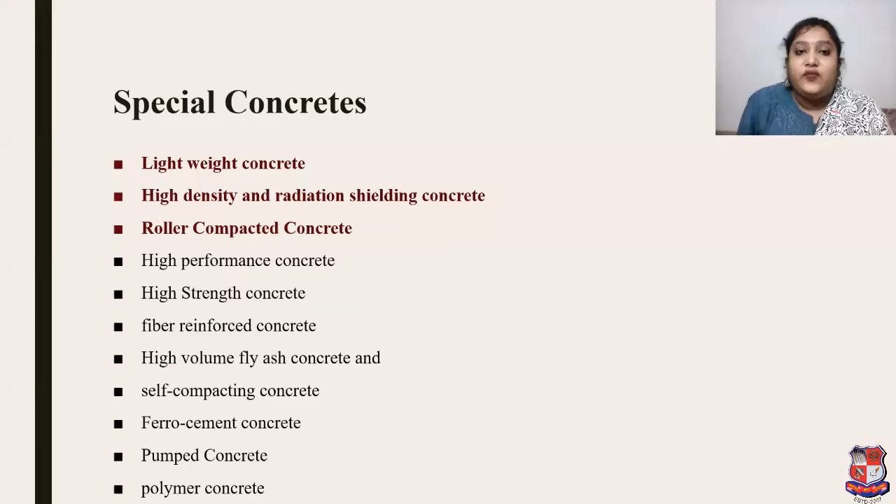If we are going to construct a structure, in that we need a good tensile nature of that concrete, good toughness of that concrete, then we will go for fiber reinforced concrete. Then as per the application there are different types of special concrete. So based on that, we will cover 3 concretes in today's topic.

So before discussing those 3 types of concrete, we will focus on the main concern: concrete. What is concrete? Concrete is the most widely used man-made construction material in the world and is second only to water as the most utilized substance on the planet.

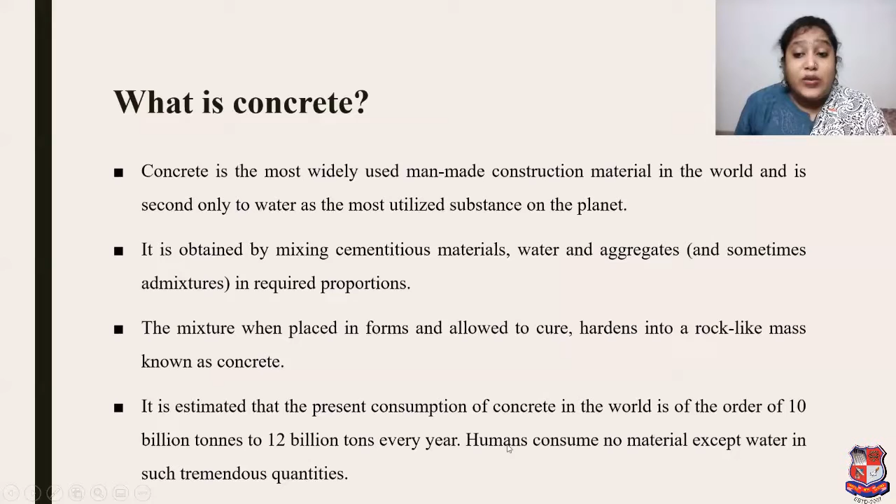Now before discussing our main special type of concrete, our main focus is on concrete. So what is concrete? Concrete is the most widely used man-made construction material in the world and is second only to water as the most utilized substance on the planet. It is obtained by mixing cementitious materials, water and aggregate, and sometimes admixtures, in required proportion as per the need of concrete and its application. The mixture, when placed in forms and allowed to cure, hardens into a rock-like mass known as concrete, meaning it's a hard material. It is estimated that the present consumption of concrete in the world is of the order of 10 billion to 12 billion tons every year. Humans consume no material except water in such large quantity.

Now regarding special concrete in recent trends: notwithstanding its versatility, cement concrete suffers from several drawbacks also, like low tensile strength, permeability to liquids and consequent corrosion of reinforcement, susceptibility to chemical attack, and low durability. Modifications have been made from time to time to overcome the deficiency of cement concrete, yet retaining the other desirable characteristics. Recent developments in material and construction technology have led to significant changes resulting in improved performance, wider and more economical use. So as per need, we have to change our type of concrete, using special chemical admixtures and chemical agents, and as per application, we have to prepare our special concrete.

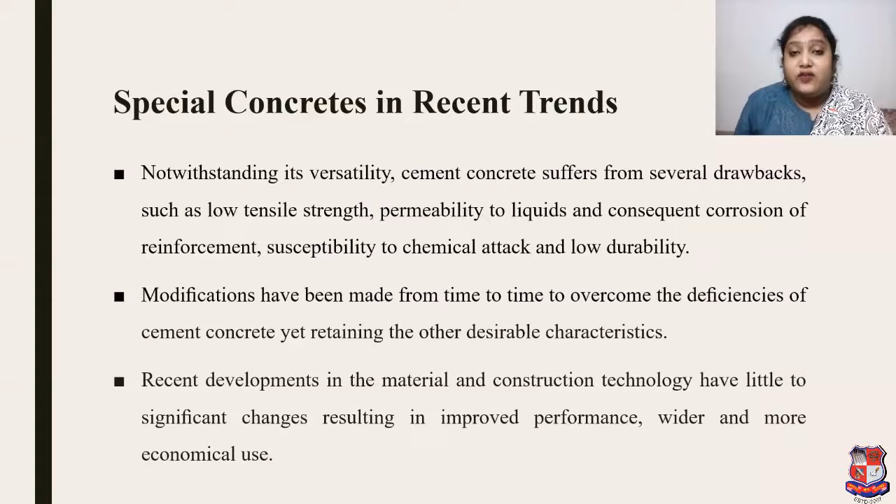So regarding lightweight concrete, this image is taken from that source. By observing this image, you can see that a lady holds that concrete cube very easily, right? By seeing the image, you can imagine how light these concrete cubes are.

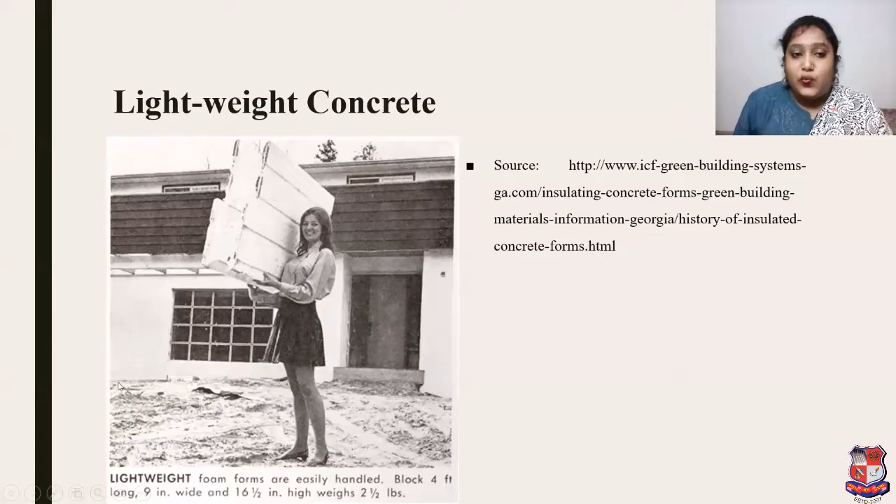Okay, so we can say that definitely it's a lightweight concrete. One of the disadvantages of conventional concrete is its high self-weight. Density of normal concrete is in the order of 2200 to 2600 kilogram per meter cube. This heavy self-weight makes it, to some extent, an uneconomical structural material.

The lightweight concrete, as we call it, is a concrete whose density varies from 300 to 1850 kg per meter cube.

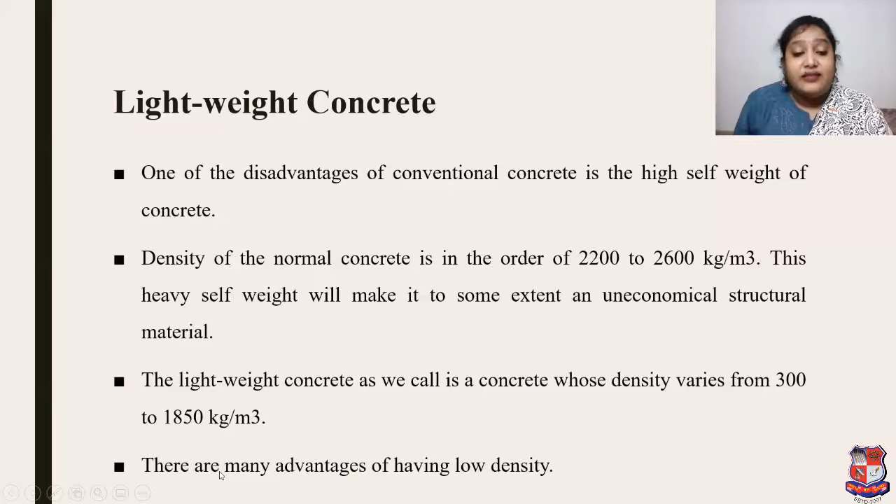There are many advantages of having a low density. It helps in reduction of dead load, increases the progress of building, and lowers the haulage and handling cost. The weight of a building on the foundation is an important factor in design, particularly in the case of weak soil and tall structures.

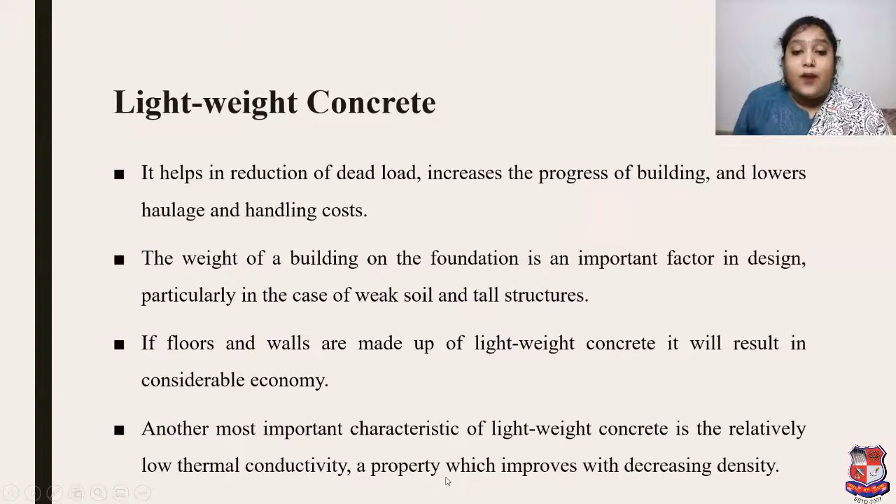If floors and walls are made up of lightweight concrete, it will result in considerable economy. Another important characteristic of lightweight concrete is its relatively low thermal conductivity, a property which improves with decreasing density. It's a salient feature. In extreme climatic conditions and in buildings where air conditioning is installed, the use of lightweight concrete with low thermal conductivity gives considerable advantage from the point of view of thermal comfort and lower power consumption. So we can say it saves electricity.

The adoption of lightweight concrete gives an outlet for industrial waste such as clinker, fly ash, slag, etc., which otherwise create problems for disposal. Basically, there is only one method for making concrete light: by the inclusion of air in concrete.

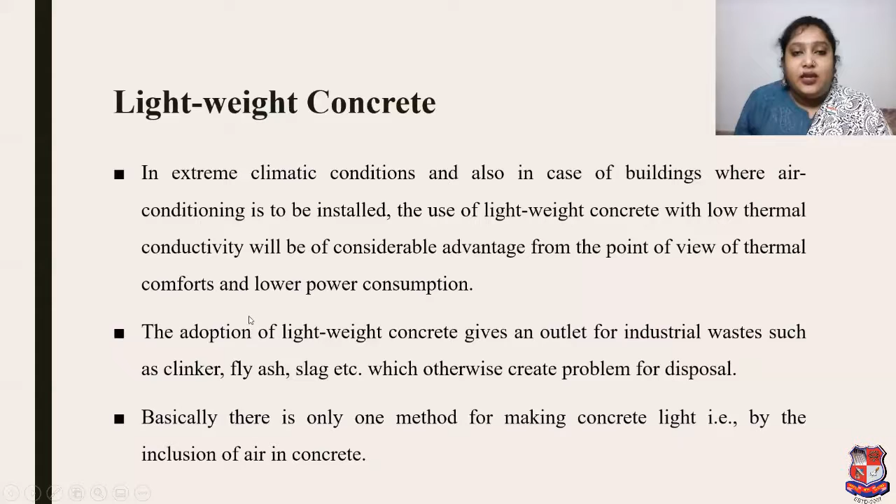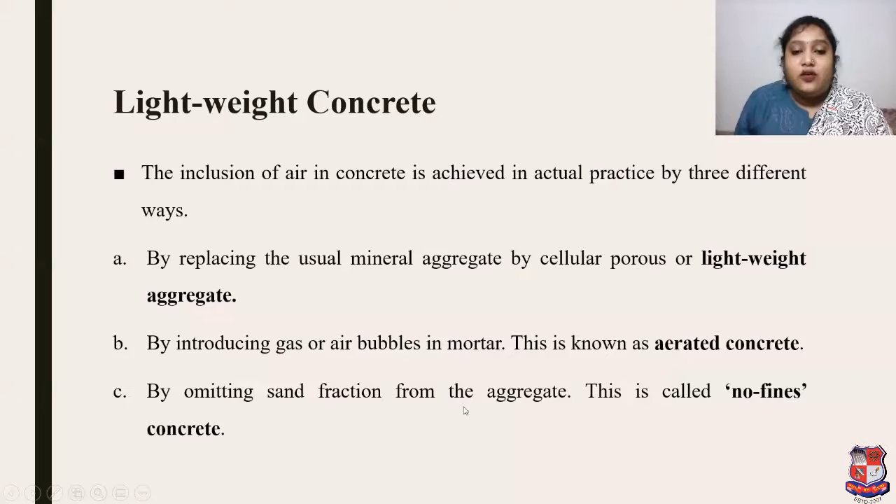The inclusion of air in concrete is achieved in actual practice by three different methods. First, by replacing the usual mineral aggregate by cellular, porous, or lightweight aggregate. Second, by introducing gas or air bubbles in mortar; this is known as aerated concrete. Third, by omitting the sand fraction from the aggregate; this is called no fines concrete.

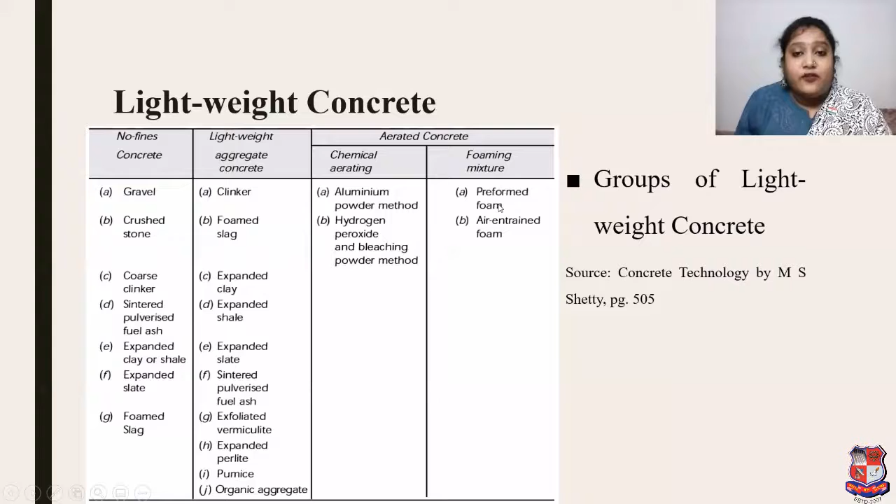In chemical aerating, there is the aluminium powder method and the hydrogen peroxide and bleaching powder method. In foaming mixture, there is the preformed foam method and the air-entrained foam method.

The lightweight aggregate can be classified into two categories: natural lightweight aggregate and artificial lightweight aggregate. Under natural lightweight aggregate, pumice, scoria, volcanic cinder, sawdust, and rice husk are included. Under artificial lightweight aggregate, artificial cinder, sintered fly ash, slag, and bloated clay are concerned.

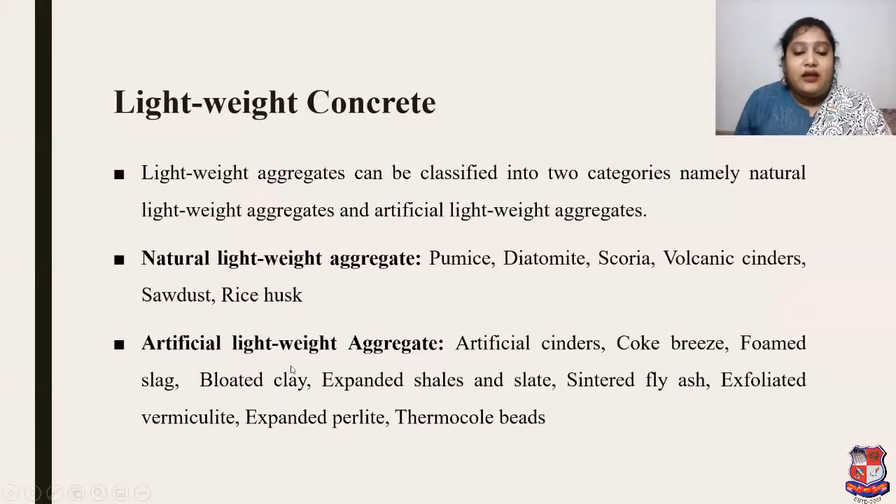Aerated concrete is made by introducing air or gas into a slurry composed of Portland cement or lime and finely crushed siliceous filler, so that when the mix sets and hardens, a uniformly cellular structure is formed. Though it is called aerated concrete, it is really not a concrete in the correct sense of the word; as described above, it is a mixture of water, cement, and finely crushed sand.

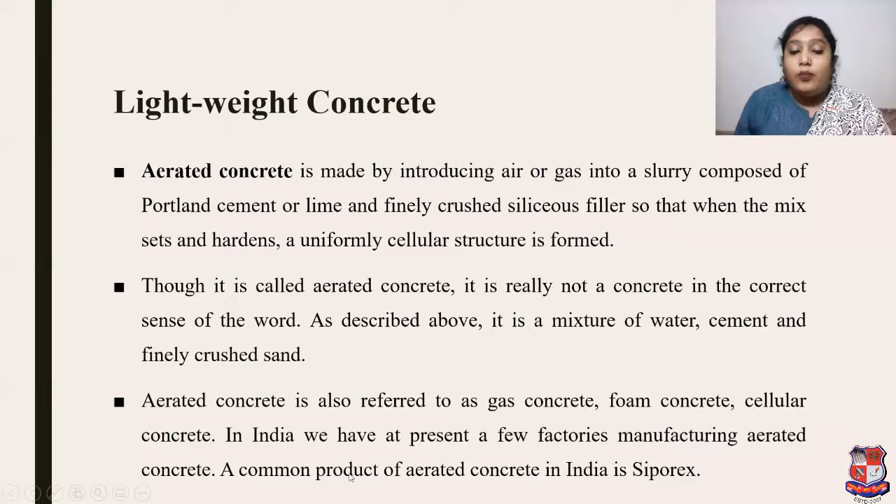Aerated concrete is also referred to as gas concrete, foam concrete, or cellular concrete. In India, we have at present a few factories manufacturing aerated concrete. A common product of aerated concrete in India is Siporex.

No fines concrete, as the term implies, is a kind of concrete from which the fine aggregate fraction has been omitted. This concrete is made up of only coarse aggregate, cement, and water. Very often, only single-sized coarse aggregate of size passing through 20 mm and retained on 10 mm is used.

No fines concrete is becoming popular because of some of the advantages it possesses over conventional concrete. The single-sized aggregates make a good no-fines concrete which, in addition to having large voids and hence being light in weight, also offers an architecturally attractive look.

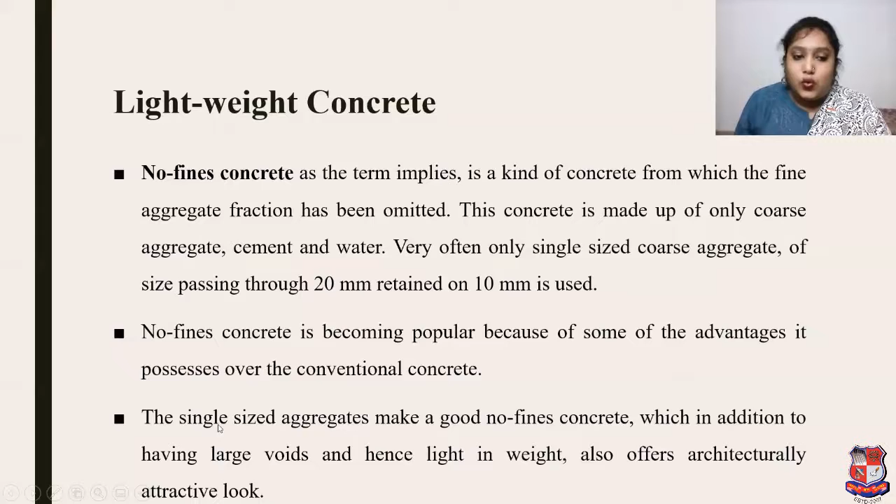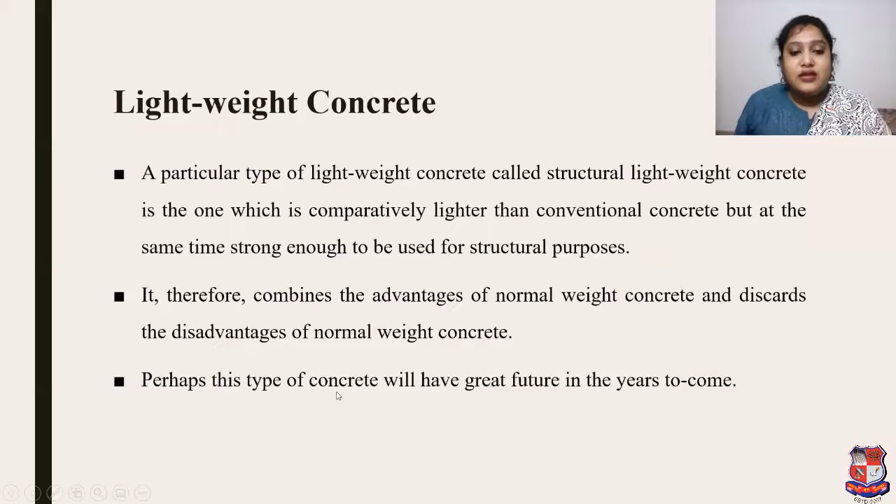A particular type of lightweight concrete called structural lightweight concrete is comparatively lighter than conventional concrete, but at the same time it is strong enough to be used for structural purposes, and that is again the salient feature of that lightweight concrete. It therefore combines the advantage of normal weight concrete and discards the disadvantage of normal weight concrete. Perhaps this type of concrete will have a great future in the years to come.

Out of the three main groups of lightweight concrete, lightweight aggregate concrete and aerated concrete are more often used than no-fines concrete. Lightweight concrete can also be classified based on the purpose for which it is used, such as structural lightweight concrete, non-load bearing concrete, and insulating concrete. Aerated concrete, which was mainly used for insulating purposes, is now being used for structural purposes, sometimes in conjunction with steel reinforcement.

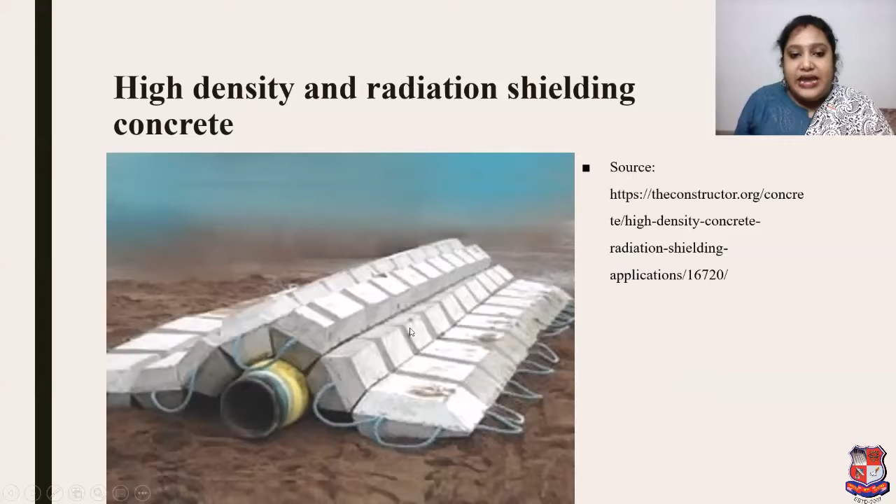Now, high density and radiation shielding concrete. The image is taken from the source mentioned here. In the image, maybe you can't see properly, but that pipe is under sea water, and above that pipe concrete cubes are kept. Why? Because due to the pressure of water that pipe will not come up, so to hold that pipe under sea water, that concrete is kept. Based on that, we can assume the density of that concrete.

To call the concrete a high density concrete, it must have a unit weight ranging from 3360 kg per cubic meter to 3840 kg per cubic meter, which is about 50% higher than the unit weight of conventional concrete. They can, however, be produced with densities up to 5280 kg per cubic meter using iron as both fine and coarse aggregate.

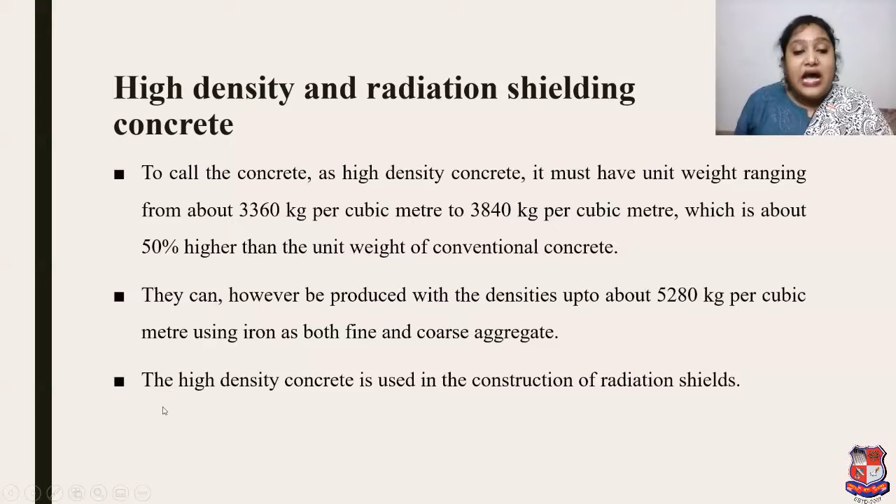High density concrete is used in the construction of radiation shields. Large scale production of penetrating radiation and radioactive materials as a result of the use of nuclear reactors, particle accelerators, industrial radiography and X-ray, gamma ray therapy require shielding material for the protection of operating personnel against the biological hazard of such radiation. Concrete, both normal and high density, is an effective and economic construction material for permanent shielding purposes.

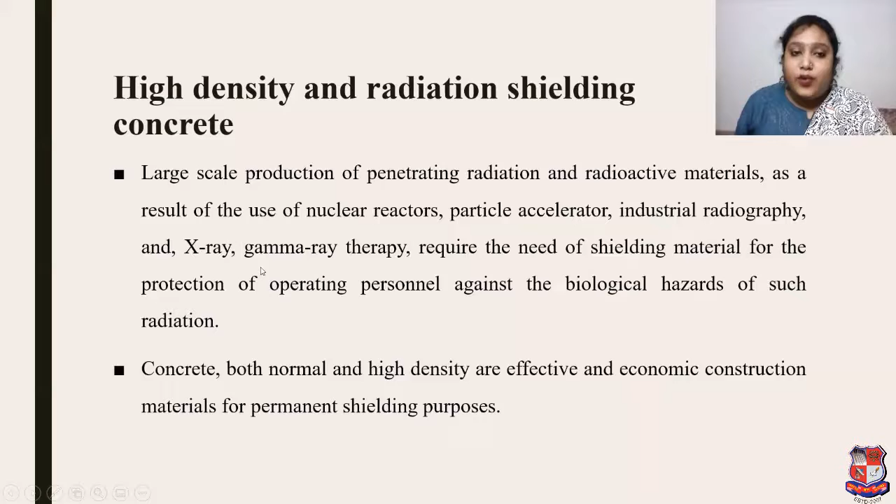There are many aggregates whose specific gravity is more than 3.5 for making heavyweight concrete. Out of these, commercially employed aggregates are barite, magnetite, hematite and many more. Also available are steel and iron aggregate in the form of shots and punching scrap for use as heavyweight aggregate. In determining...

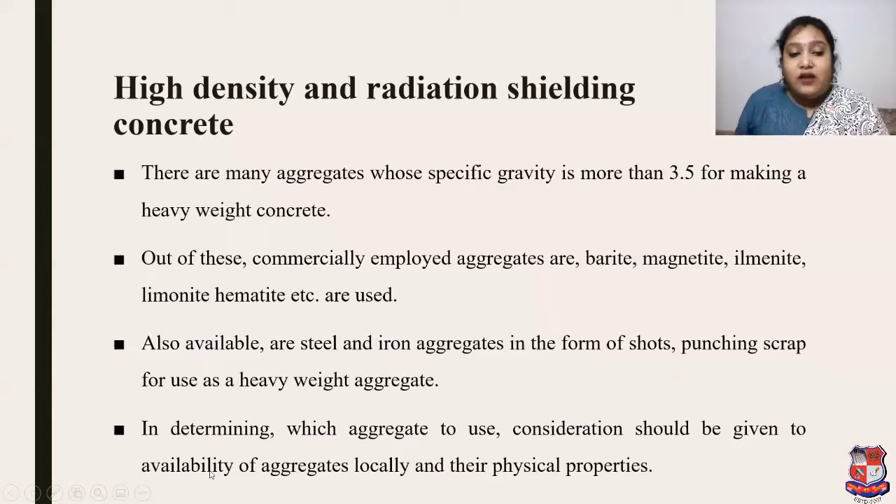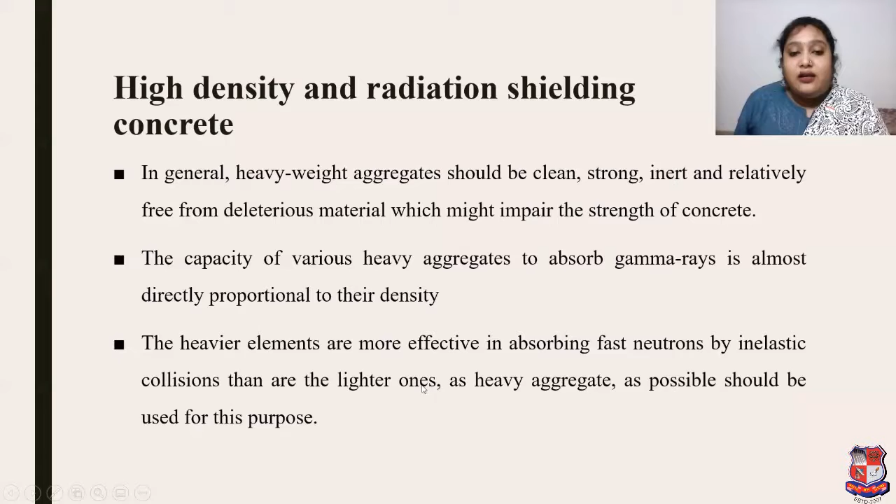In determining which aggregate to use, consideration should be given to the availability of aggregate locally and their physical properties. In general, heavyweight aggregates should be clean, strong, inert and relatively free from deleterious material which might impair the strength of concrete. The capacity of various heavy aggregates to absorb gamma rays is almost directly proportional to their density. The heavier elements are more effective in absorbing fast neutrons by inelastic collisions than lighter ones. As heavy an aggregate as possible should be used for this purpose.

However, density is not the only factor to be considered in the selection of an aggregate for neutron concrete shield. These materials contain a high percentage of water of hydration. On heating the concrete, some of this fixed water in the aggregate may be lost. Limonite and goethite are a reliable source of hydrogen as long as the shield temperature does not exceed 200 degrees centigrade, and serpentine is good up to about 400 degrees centigrade.

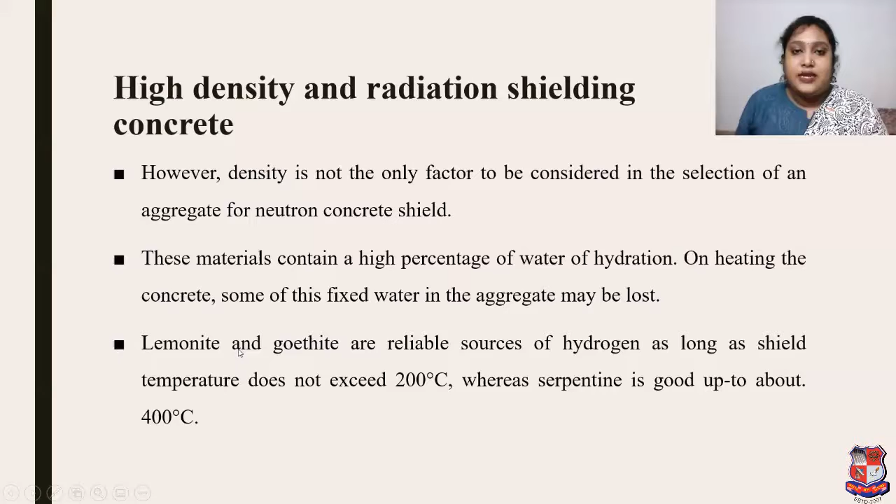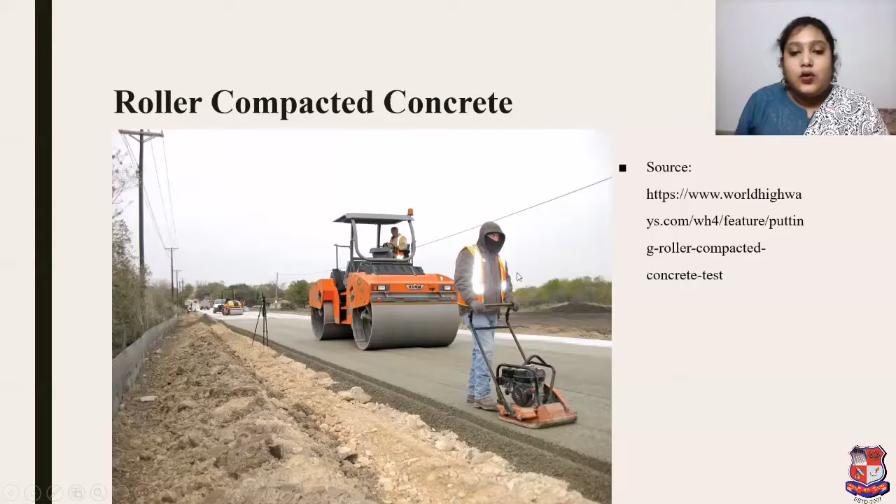Here you can see the image of roller compacted concrete. That image is taken from this source. From the image you can see concrete laying on the surface and a person compacting it through a roller. So ACI 207.5R-89 defines roller compacted concrete as concrete compacted by roller compaction. The concrete mixture in its unhardened state must support a roller while being compacted. The development of roller compacted concrete caused a major shift in the construction practice of mass concrete dams.

The traditional method of placing, compacting and consolidating mass concrete is at best a slow process. Improvement in earth moving equipment made the construction of earth and rock fill dams speedier and therefore more cost effective.

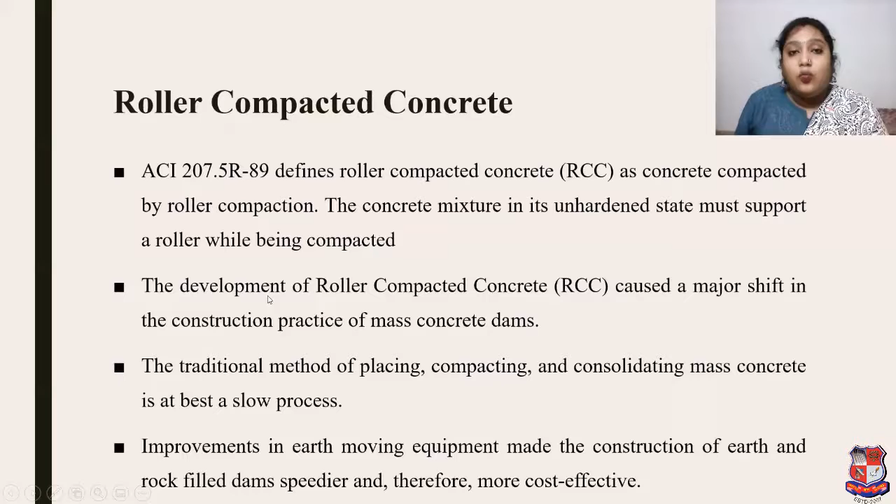Roller compacted concrete is placed in layers thin enough to allow complete compaction. The optimum layer thickness ranges from 20 to 30 cm.

To ensure adequate bonding between the new and old layer or at a cold joint, segregation must be prevented, and a high plasticity bedding mix must be used at the start of the placement.

For effective consolidation, roller compacted concrete must be dry enough to support the mass of the vibrating equipment, but wet enough to allow the cement paste to be evenly distributed throughout the mass during mixing and consolidation process.

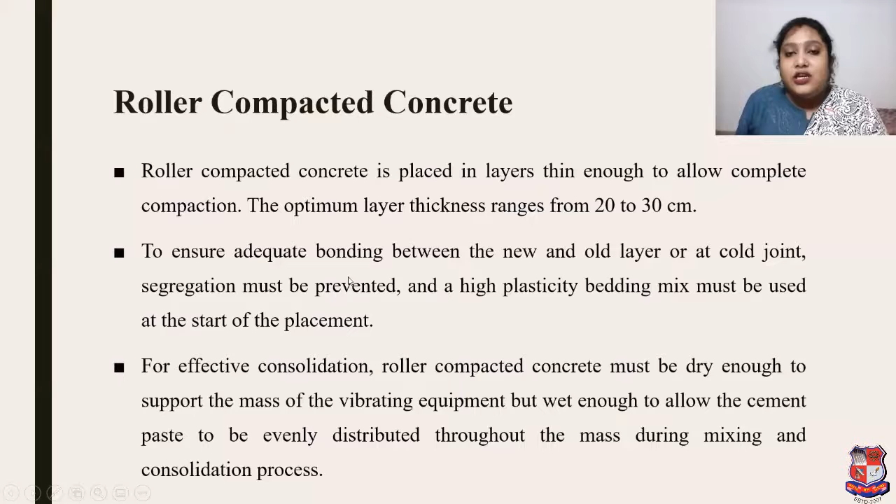In India, roller compacted concrete has been used as base concrete in the construction of the Delhi Mathura concrete road project. Similarly, roller compacted concrete has been used as base course concrete in the Pune Mumbai Express Highway construction. In both projects, the roller compacted concrete was referred to as dry lean concrete.

The grade of concrete was M10, where M represents mixture and 10 represents its strength in megapascal after 28 days, with a thickness of 15 cm. Such concrete was thoroughly compacted by a vibratory roller, over which pavement quality concrete of grade M40 and 35 cm thick was laid.

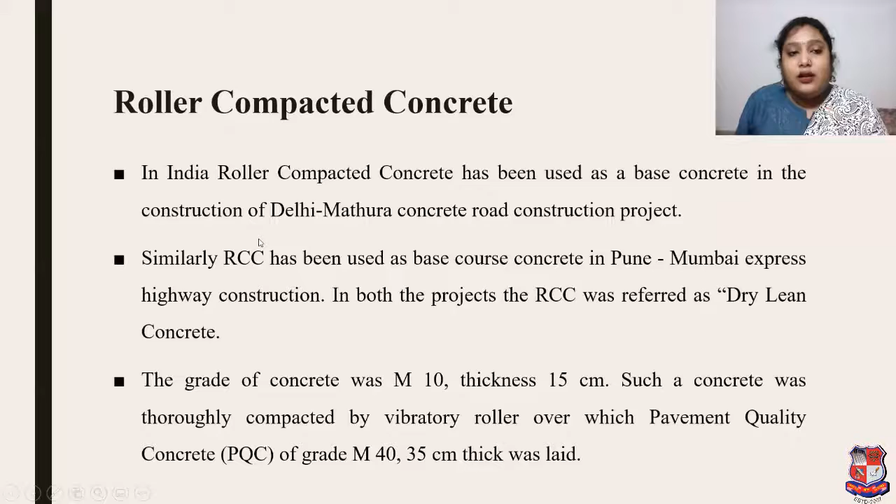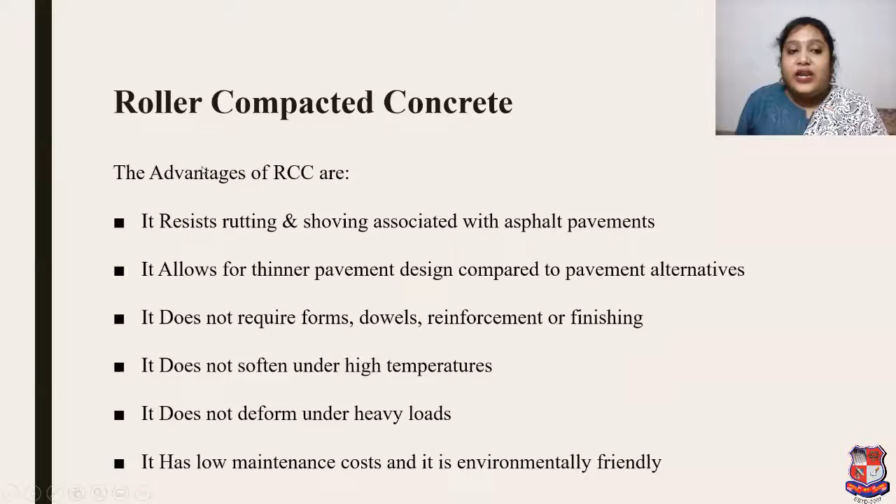If we discuss the disadvantages, roller compacted concrete does not have the aesthetic appeal offered by conventional concrete.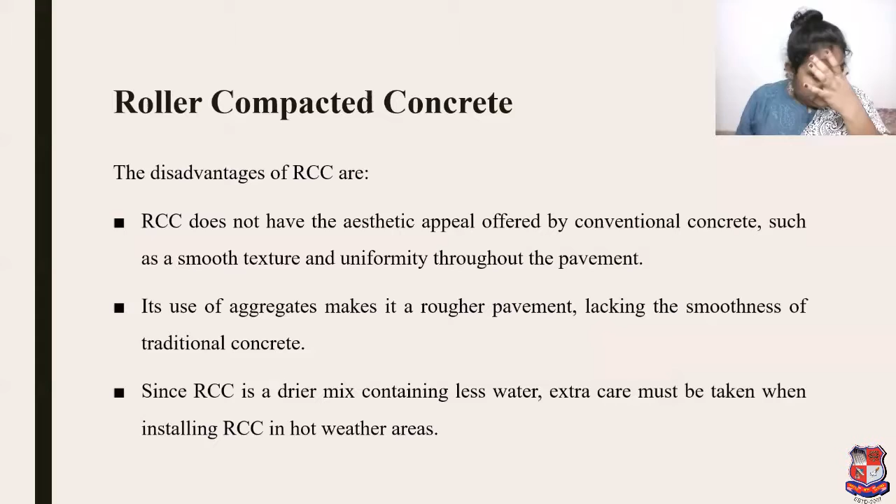If we discuss the disadvantages of roller compacted concrete, RCC does not have the aesthetic appeal offered by conventional concrete, such as a smooth texture and uniformity throughout the pavement. Its use of aggregate makes it a rougher pavement, lacking the smoothness of traditional concrete.

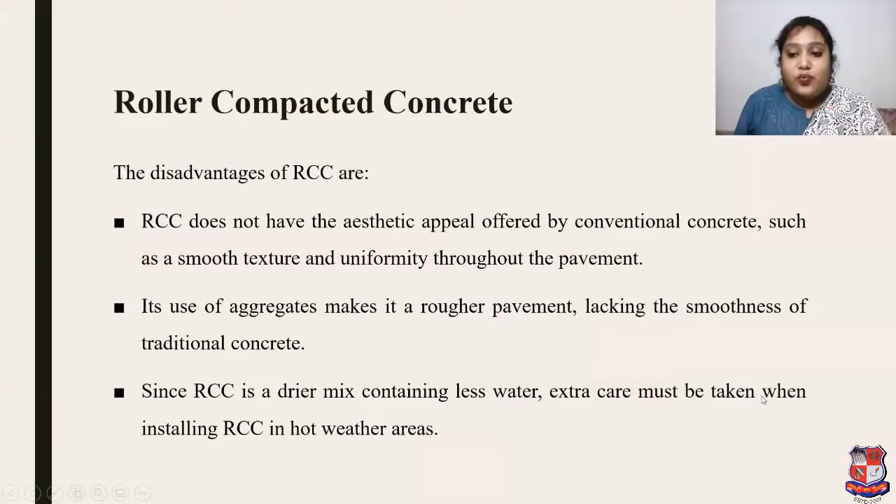Since roller compacted concrete is a drier mix containing less water, extra care must be taken when installing RCC in hot weather areas.

So dear students, as per our syllabus, we covered three special types of concrete. Based on that theory, we can give a small comparison between normal concrete and special concrete. Normal concrete is used for normal work like buildings, bridges, roads, etc.

As I mentioned earlier about special concrete, this type of concrete is used for special types of structures like nuclear reactors, buildings with acoustic treatment, air conditioned buildings, heavy bridges, and heavy dams.

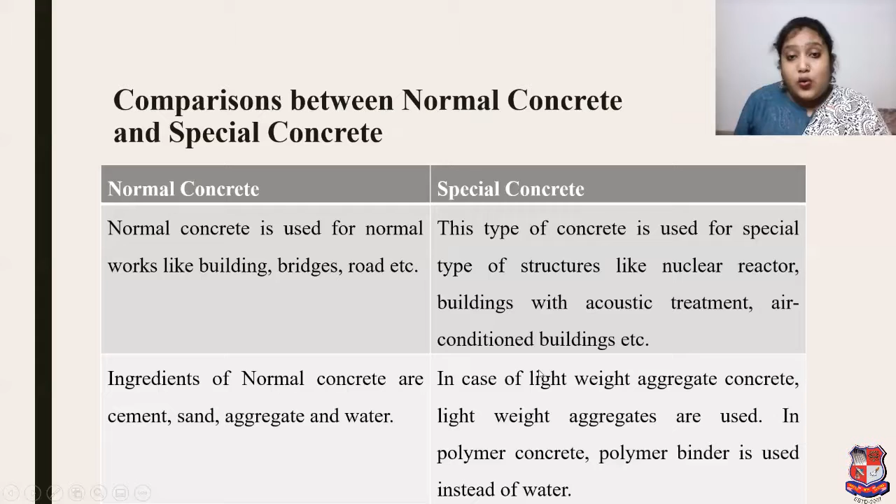Ingredients of normal concrete are cement, sand, aggregate and water. In special concrete, in case of lightweight concrete, lightweight aggregates are used. In polymer concrete, polymer binder is used instead of water. In fiber reinforced concrete, fiber is used. So as per application, the concrete ingredients change.

Construction is carried out by conventional methods in normal concrete, but in special concrete, construction is done by special techniques. In normal concrete, properties like density and strength are of normal range, but in special concrete, properties like density and strength are of higher range.

For example, the density of lightweight concrete is about 500 to 2000 kilogram per meter cube, and that of heavyweight concrete is about 3000 to 5000 kilogram per meter cube. By mistake an extra point is shown there, so don't consider it.

Normal concrete is economical, and special concrete is costly because it requires special techniques.

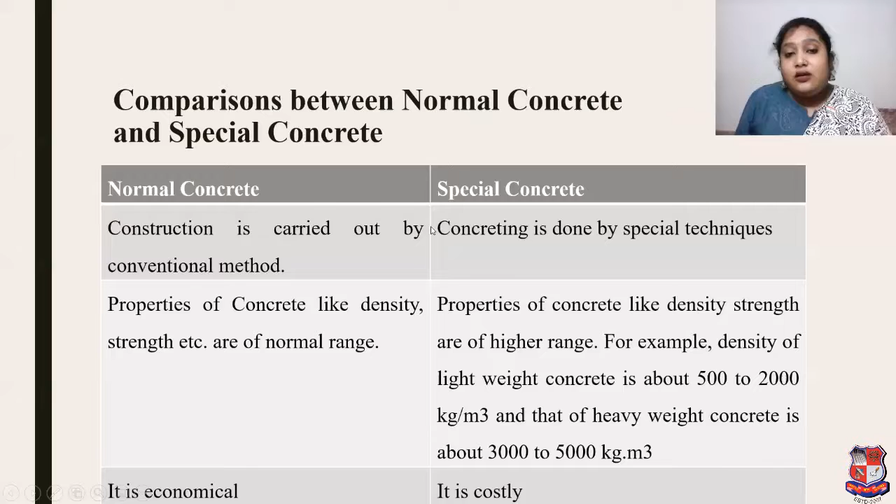So based on the theory we discussed, you got the fundamental knowledge regarding special types of concrete, and based on that we compared special concrete and normal concrete. The outcome of this lecture, the comparison we discussed at the end, was asked as a question in your GTU semester exam of a previous year paper. So dear students, whenever any lecture or theory class is conducted, focus and try to understand the output of that lecture as per your final exams.